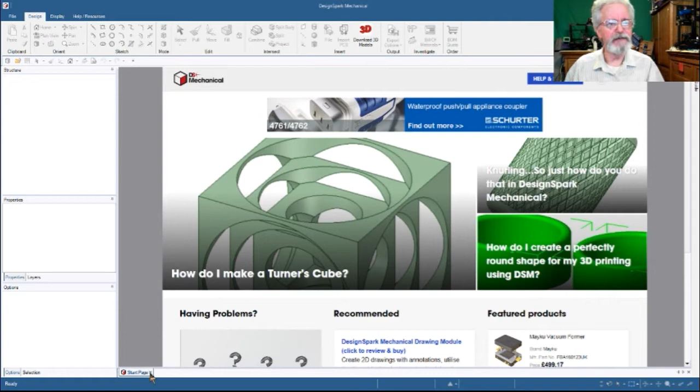Now this is DesignSpark Mechanical. This is the startup page. We're going to go ahead and kill that, and that gives us our blank space.

So we're going to go here, File, New, and create a new design. The very first thing I like to do in DesignSpark is, down here we have a tab that says Design 2, so we're going to save this file as spinning top. The reason we do that is as we progress through our design, on a periodic basis we are going to hit Control-S to save our work.

Now, DesignSpark does have an automatic save feature, but in my experience it doesn't seem to quite work well. I can show you how to get to it.

If you go here to the DesignSpark options, a window is going to come up. Let's see, it's not going to show up on our video because it's not part of the main DesignSpark window, so let's see if we can figure out how to pop that up. I may have to create a different window capture. Bear with me, because I really do want you to see this. So we're going to create a new window capture called DesignSpark Options window, make the source visible, and there we go. We'll capture the cursor too, and now you should be seeing the new DesignSpark window.

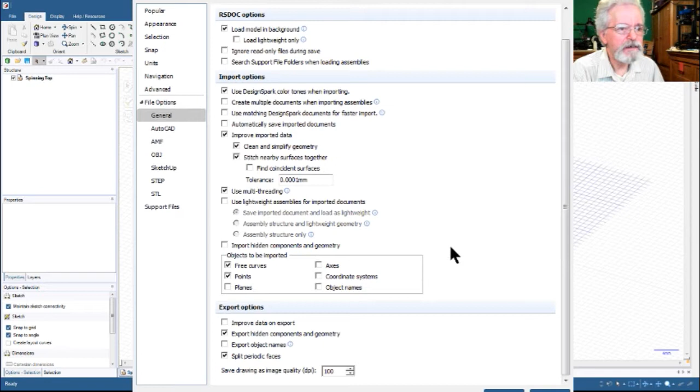Let's see, Popular, file options, and then we have general. Tolerance, is it further down? Here it is, under the support files.

So there's an option here for backing up every certain number of minutes. If we turn that on, we can choose how many minutes, and we can keep the backup files for a certain number of days, and we can tell it where we want the backup. This puts the data in the app data folder under roaming, which is kind of weird, and you can also clear the backup files if needed, or browse for a different location. But it defaults to the roaming folder under app data—so username, app data, roaming, SpaceClaim, and then the folder is auto save.

You can tell it to keep the backup file for 5 days. Now, what I have found is, for some reason, if things happen to these automatic backup files, things also happen to your main file. So I don't use this, I just do a Control S, but it's there if you decide you want to use it.

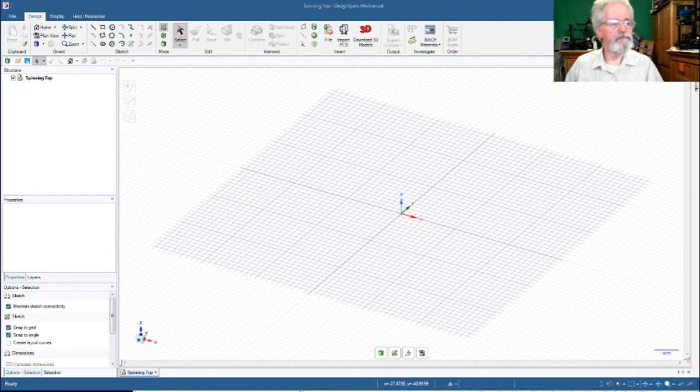There's been a number of issues with that. Now let's see here, my window changed, so let's go back to what we were, and we can turn off the options window. So that's how you get to the options.

You just go to the file menu and go to DesignSpark options, and that will open the options window. Now here in DesignSpark, because of the way my video setup is set up, for whatever reason, you don't see the menu. So right now I have a window open. It's the menu window, the file menu, but my video capture card doesn't seem to be able to capture that part of the window. So I probably have something set up wrong, but I'm using Open Broadcaster Software to capture these screens.

Okay, so let's get started.

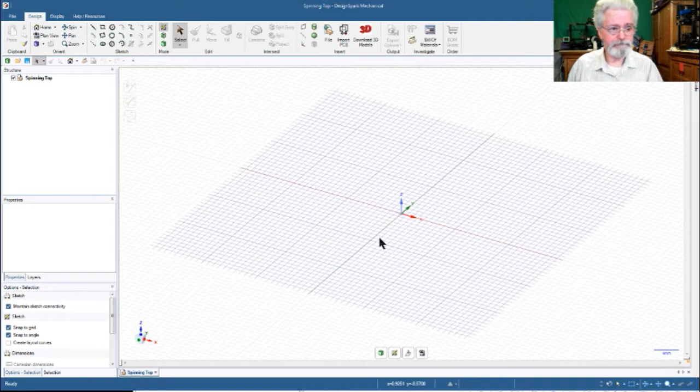So the first thing that we have here is we have a sketch plane, and we're going to hit V to make the sketch plane present itself face forward. And we're going to start off with a sketch. So the sketch is going to be for the top, not the top of the object, the top. So we're going to have a little bit of problem with nomenclature here, but that's okay.

So what we're going to do is we're going to create a top that's, let's see, let's make a top that's 100 millimeters in diameter.

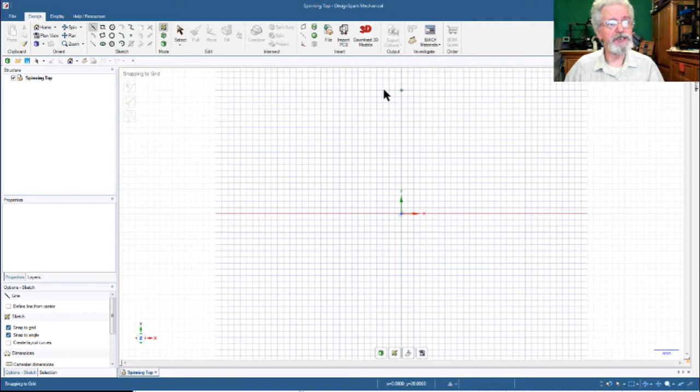So to do that, what we're going to do is we're going to draw some lines here. We're going to make a sketch, and we're going to draw a line. So we're going to hit the L key for line, and we're going to start here in the center, and we're going to come out, and we're going to go 50 millimeters. And that's going to give us a line that's 50 millimeters long, just like that.

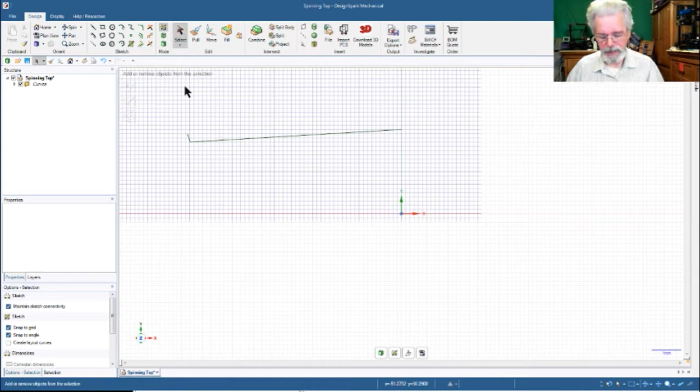Whoop. And we don't want to angle, so let's back that off a little bit and do this again. Line, 50 millimeters, and then hit enter. Now we've frozen that line in place.

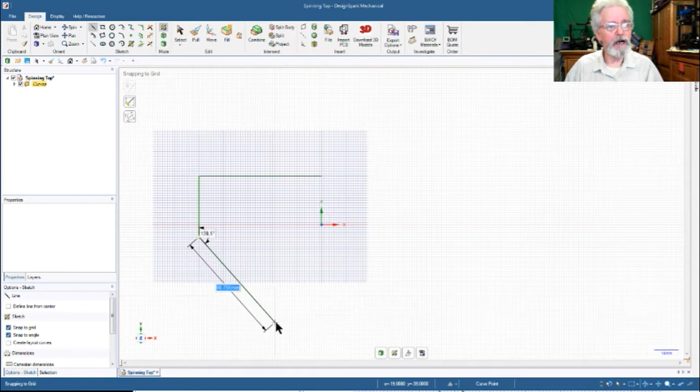Now we're going to do another line that is, let's say, 25 millimeters in the Y, and then I'm going to zoom out a little bit just to give us a little bit of working room. And then we're going to go, let's say, a 33-degree angle until we get back to our original line on the grid. So that is going to give us a top that has a point.

All right, and then we're going to do a line down and create a closed subject. And then I'm going to make a little construction line here at the top because we need that, for a particular reason. So we're going to go there to the corner, and then that's it. So we have our shape, which is our lines.

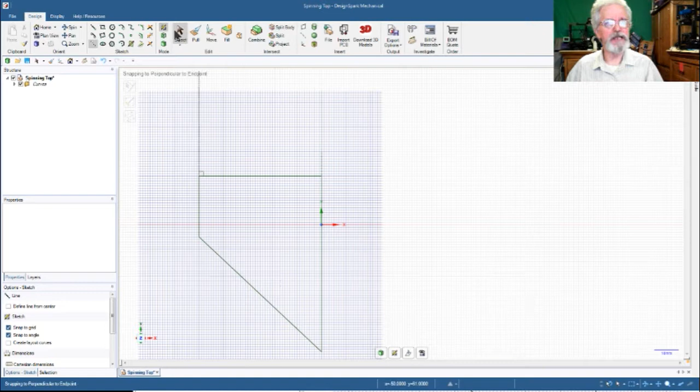And so let me go ahead and select all the lines so we can see the shape. And we're there, and there, and there. So there's the shape of our top. And we'll fix it up a little bit here as we go along.

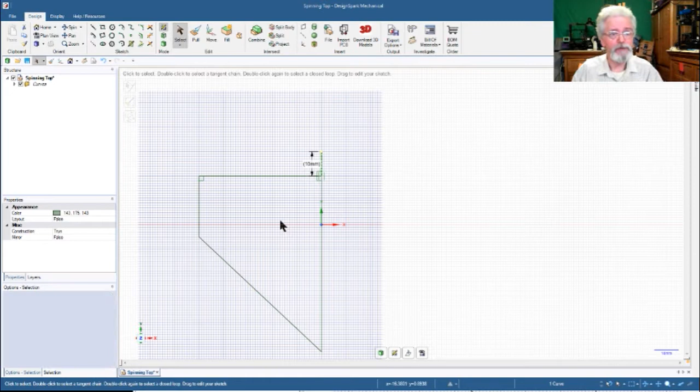And then we have our construction line here, which we're going to use as an axis. Now we're going to use that as an axis. So we're going to go P for pull, P on the keyboard for pull tool. And that's going to give us our solid shape. But we want to rotate this.

So we're going to go P, and then we're going to say we want to rotate, and we're going to choose an axis to rotate about. So we're going to choose the construction line. And then rotate - it says rotate the face around the axis, select one or more faces to revolve, and then that's it. And then we're going to say right here, full pull, and that's going to rotate this shape around that construction line as the axis. So we're going to click on that.

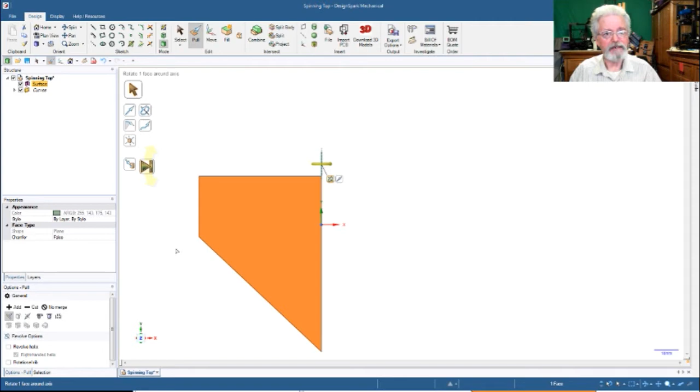And there it goes. My computer's a little slow because it's a little old, but now we have a top, and as you can see, the top is cylindrical that comes to a point. And so that gives us our basic shape of the top, and it's fairly easy to do.

A lot easier to do this way than in Fusion 360. It's very simple. You just draw the sketch and tell it to revolve around the axis, and you're done.

So, Chico, be quiet. Hey.

The dogs have no concept of video.

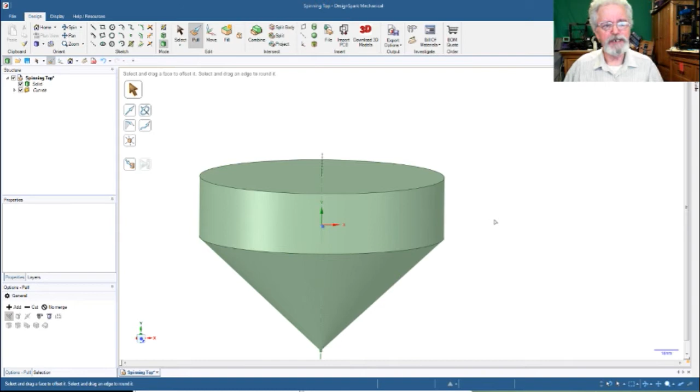Now the next thing we need to do is create a hole for the spindle that you use to spin the top. So we're going to go here to the top, Control V, and bring that to the center.

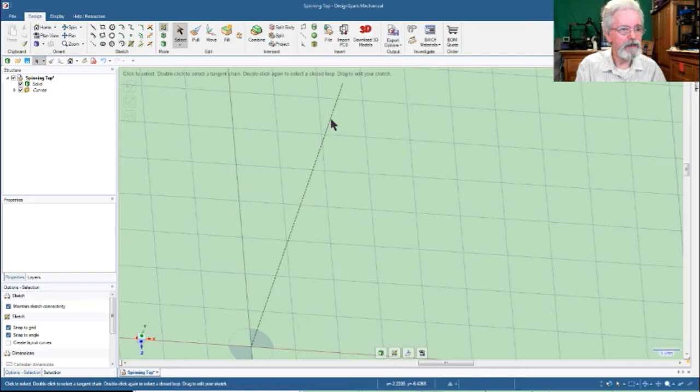Right now we have our construction line still there, so we're going to select that, if we can get a hold of it. It doesn't seem to want to let us get it. Let's see here, if we change planes, there it is. Okay, so now we can select it and delete it. All right, so now that's gone.

So now let's go ahead and change planes again. Just click down on the bottom and then we can pick that up. Now we have the plane we want, so we're going to use that.

We're going to zoom in a little bit and create a hole for our spindle to go in. So we're going to hit C for circle, go to the center, and we want a spindle that is, say, 6 millimeters in diameter.

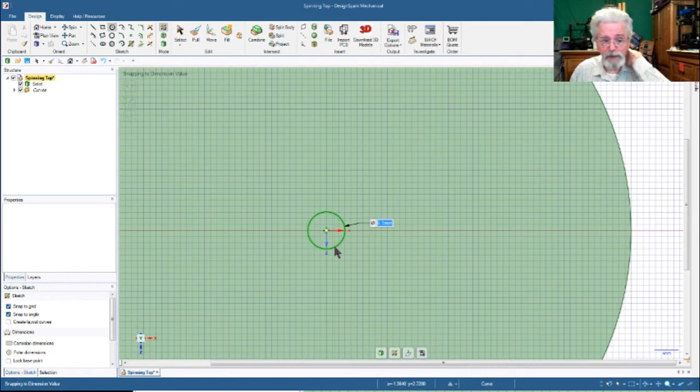Actually, we're going to do this a little bit bigger. We want to say 6.1 millimeters. Now the reason we want the 0.1 is this is going to be a press fit for the spindle, and if we create a spindle that's 6 millimeters, it probably won't go in there.

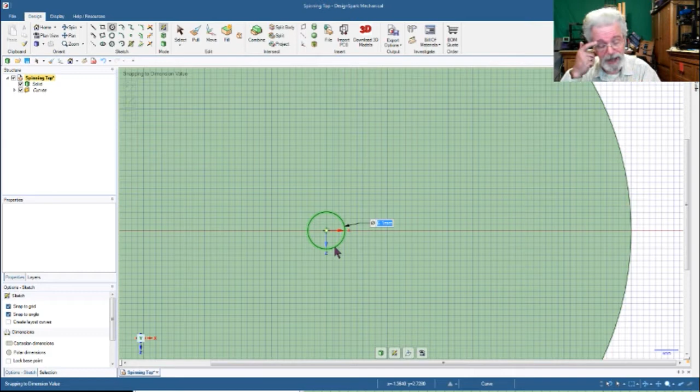And I know the tolerance that my printer prints, if I'm in a circle and I go to 0.25... let's do this instead. I want to do 6.2 millimeters, to make this just a little snug, so it's going to be a press fit.

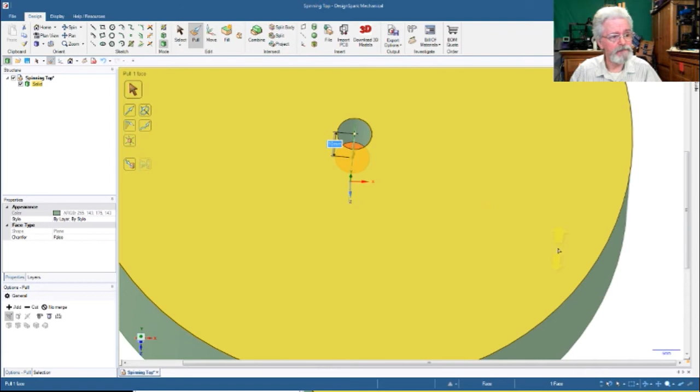So we're going to get out of that mode, hit D to get back to three-dimensional mode, and then push this down into the shape, let's say 10 millimeters. So that gives us a hole 10 millimeters deep and 6.2 millimeters in diameter.

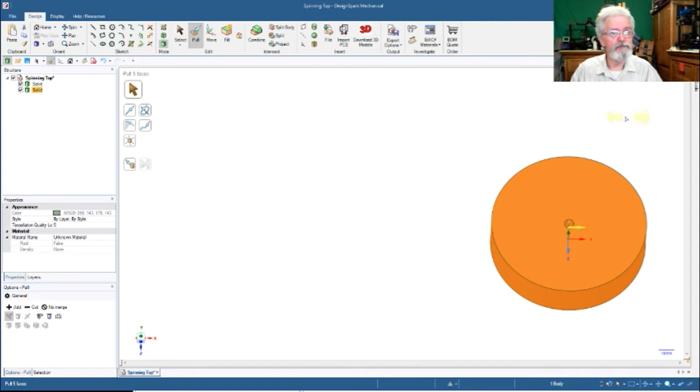All right, now that gives us one hole. Now let's say I'm going to copy this object. I selected it with the select tool and did a Control C, then pasted it, then went to the move tool in the ribbon menu and just moved this over by 150 millimeters, just to give us some space to work with. So now we have two tops.

Now, one of the interesting things we can do is make this top hollow. There's an interesting way to do this. This top is an enclosed object, and there's an interesting aspect in the shell command in DesignSpark.

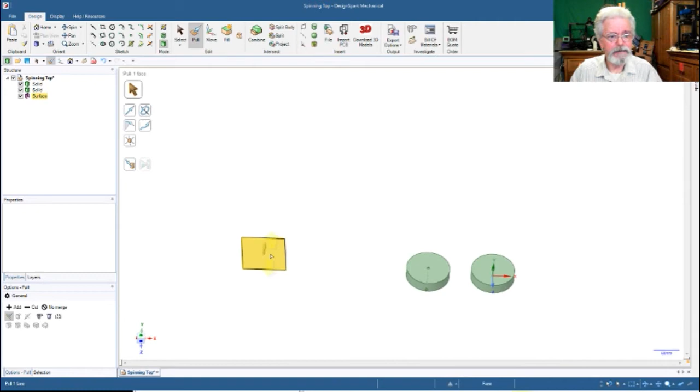For example, just for the heck of it, if I go here to a sketch plane and do a rectangle, R for rectangle, and create a rectangle that is, say, 100 millimeters square, and I go back here and pull that up 100 millimeters, now we have a 100 millimeter square cube.

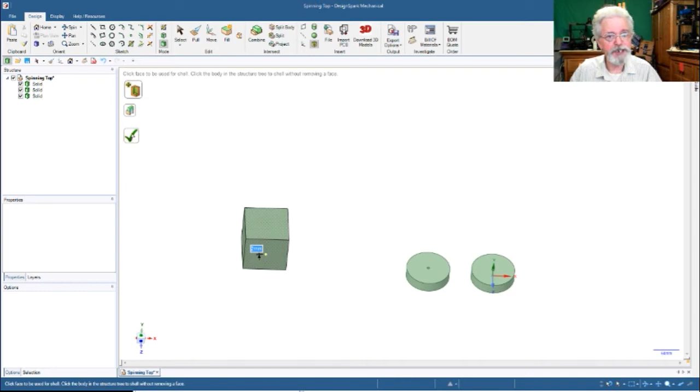Now I can actually create this cube as a hollow cube where there's nothing inside it. How you do that is you go over to the component list, select the component and highlight the whole thing, then go to the shell option up on the ribbon, and it asks how thick you want the wall. It defaults to 1 millimeter, so let's say 2 millimeters. When we complete the shell with the check mark, we now actually have a hollow box.

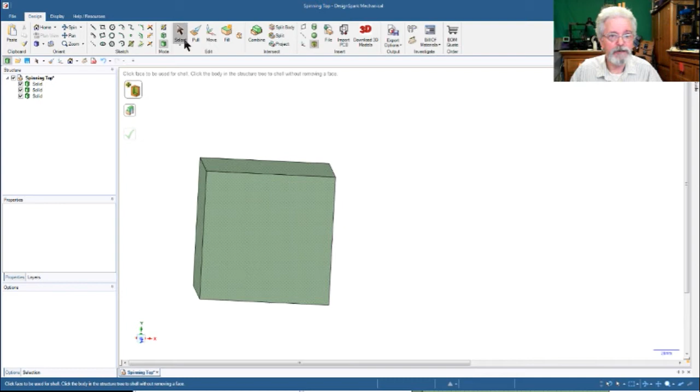You can see here it's a little crooked, so let's see if we can figure out how to move it around. Let's go ahead and select it. So here we have a cube.

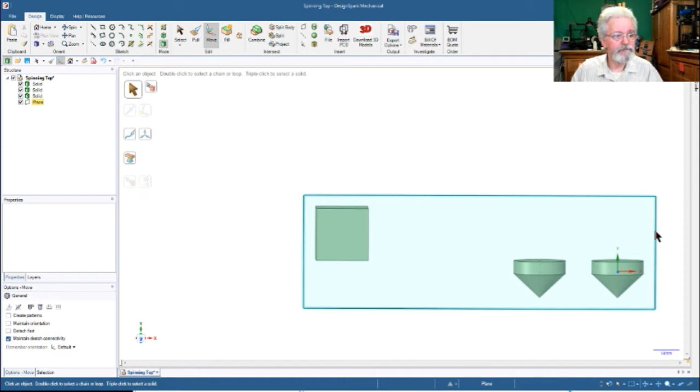Let's create a plane, and it's creating a plane for the whole sketch here, as you can see. But we want to create the plane so we can split the cube. Let's move the plane over here. Now I got to be careful because I don't want to cut my tops. Let's see if we can move the plane over. No, it doesn't like that.

See, it's going to cut right through the tops. So let's...

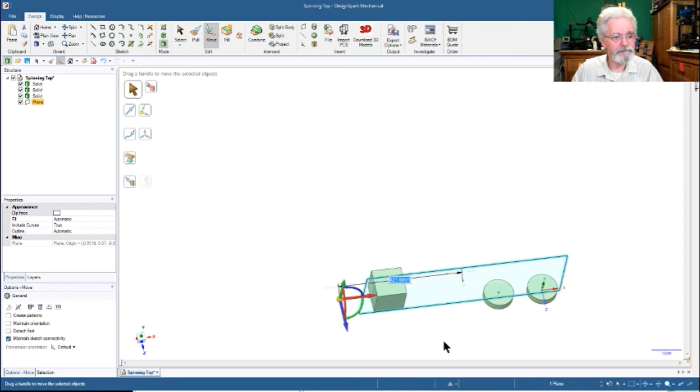Let me do this. I'm going to kill that plane, and I'm going to move the cube. Got to select the whole thing to move the whole thing there, and then I'm going to create a plane on the face of the cube. That way we can avoid our tops, and then we can move the plane

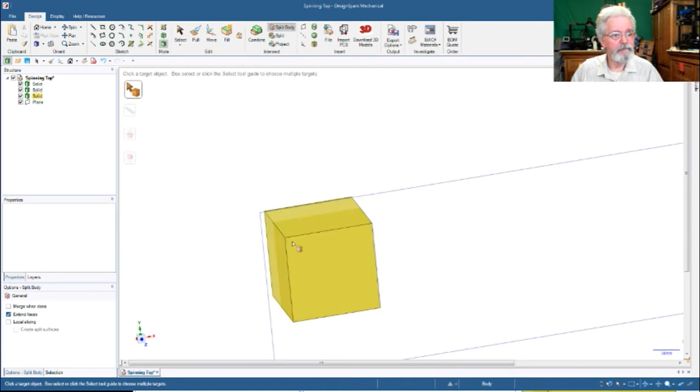back into the cube. And now if we come into the plane and we tell the plane to split the body, so we want to split that body, and we want to use the plane to cut the body. So now that creates a cut in the cube.

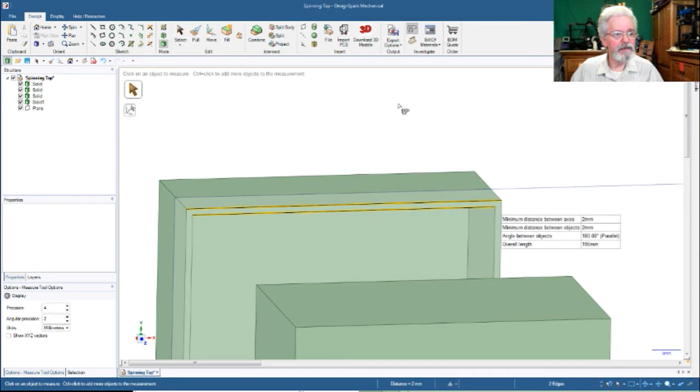And so now we have solid 1 and solid 2 here. So if we say solid 1 and we tell solid 1 to move, we're going to move it out, and you can see here that there's actually a shell with a 2mm wall. So if we go here and here and we tell it, here we have 2mm.

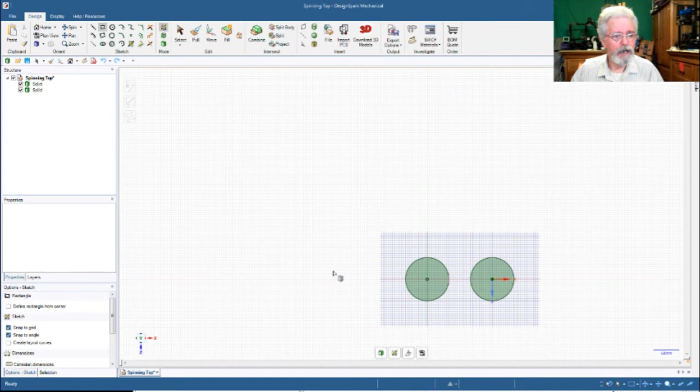Okay, so that's how you create a hollow shape. Now, so you can do that. So let's go ahead and back out. And we'll get back to our tops.

So now, here we have our solid top over here, and this is the top we're going to use to make a shell. So if we select this, we're going to rename these objects here so we can keep track of them.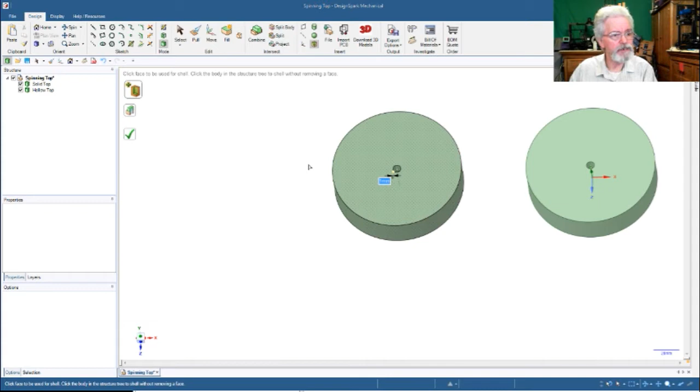This one is solid top, and this one is hollow top. All right, so this one is the hollow top, so we're going to shell this one, and we're going to tell it we want this one to be 2mm. So now what we've done is we have created a hollow top with a 2mm shell, including inside of the hole. Okay, so this hole is 10mm deep, and then 2mm below and around this hole is empty space. Okay, so that's pretty much how that works.

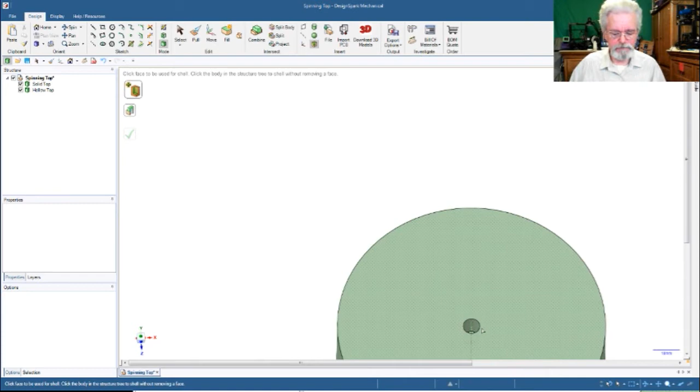So I'm going to go ahead and hit home, and then we're going to go ahead and rotate this around. Now, what I'm going to do is I'm going to cut some holes in here, and see if we can't make something that can make a sound.

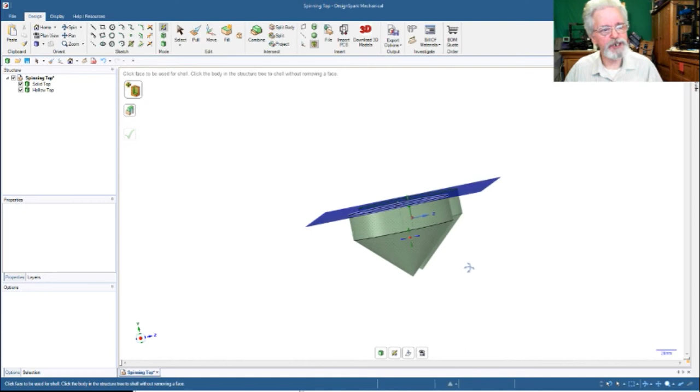Because we're dealing with cylinders, it's a lot easier to deal with the sketch planes. So if you go K, V, and you select the top, then you can change the plane to a particular surface. So in this case, what we want to do is we want to change the plane because we want to sketch on the side here.

So let's see if we can't select a surface to... maybe we're not going to be able to do that. Let's see. So we have our cylinder, K V. There we go. All right, so now I believe we're probably, yeah, we're on the surface. All right, so that's what we want.

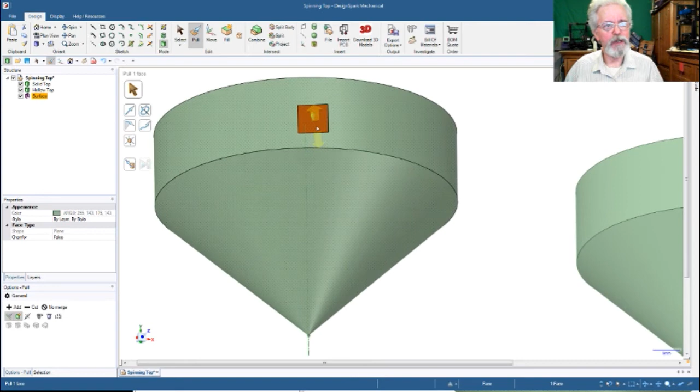And so what we're going to do is we're going to put a rectangle 10 millimeters square in that surface, and now we can use that to punch a hole, and we're going to punch a hole all the way through.

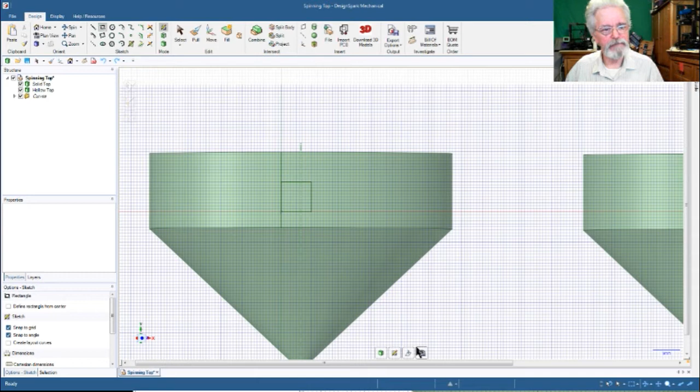All the way through. Oop, we ended up punching a hole. Let's go ahead and back up a little bit. And we're going to lower our rectangle slightly so that we can miss our center point. So we're going to draw the rectangle there, pull it up slightly, and go through all the way.

And so now you can see inside of the top there is our hole, and if we spin it around you can see it comes out the other side. All right, and so these are going to be our...

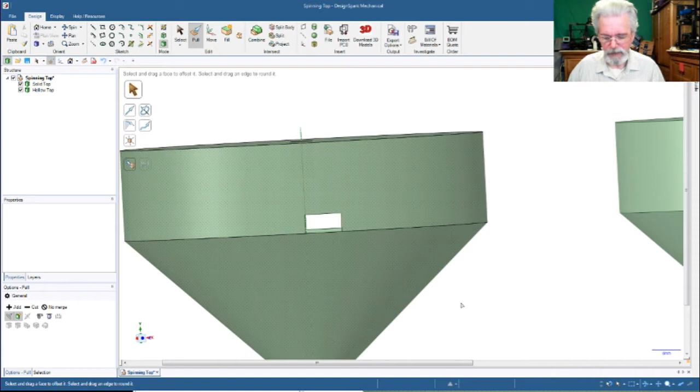Actually we need to center these, so let's figure out how to center them because they're not quite centered. So let's see, and part of the reason is our sketch plane is not centered.

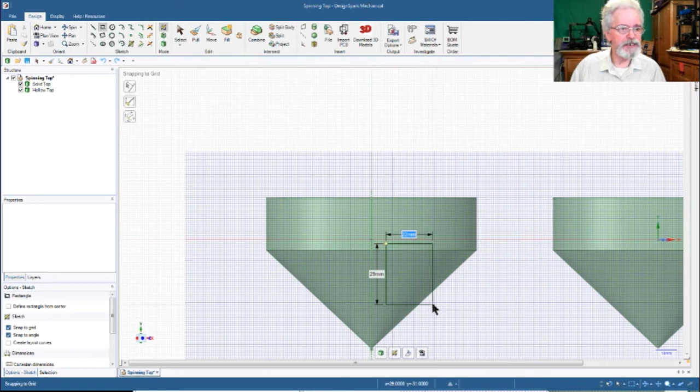So all right, so now there it is, it's centered, we're looking straight on, and then we're going to go ahead and we're going to say 1, 2, 3, 4, 5, and we're going to draw a rectangle that's 10 by 5.

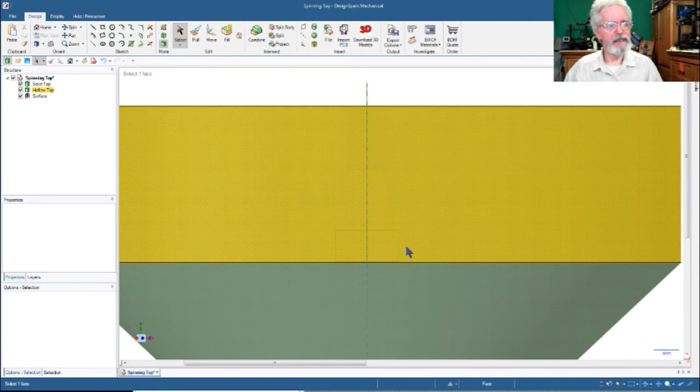And let's see, I think I probably goofed that up, so let's bring that out 1 and bring that in 1. So now we're right on the center, 10 millimeters on our sketch plane. Go here and then go here, and then we can push it through.

You can see there's a little bit of offset here, and that has to do with the curvature of the shape of the top and in relation to the sketch plane. So let's go ahead and tell it to pull, and we're going to pull that all the way through. Just make sure we get all the way through. We haven't hit the bottom, and there's our hole on the other side.

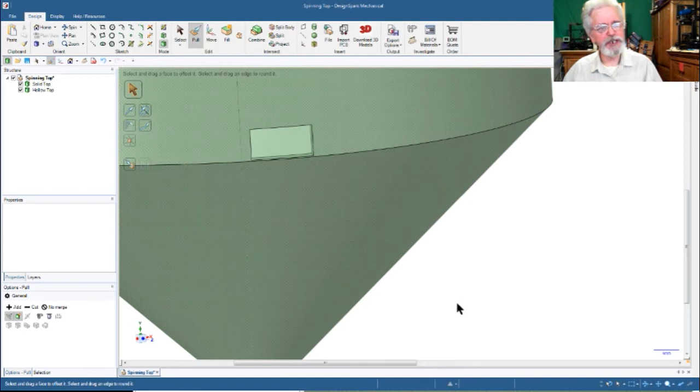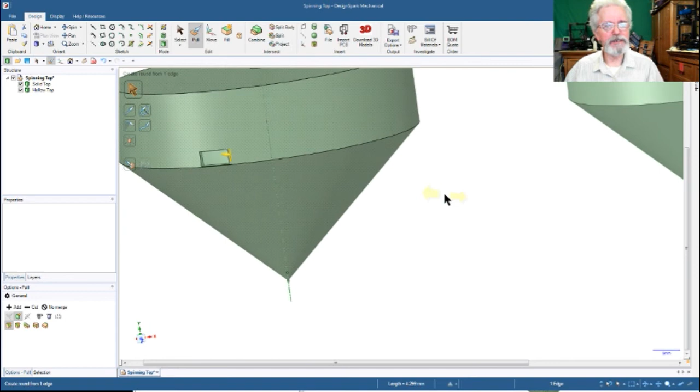Okay, so now what we want to do is we want to make a little chamfer to make this whistle as it spins. Now we don't know which direction it's going to spin yet, so we want to just catch both of these edges. So we're going to highlight this edge, scroll out a little bit, turn this way, scroll back in this way, and hold down the control key, and now we have both edges selected. Now we're going to zoom out, and we're going to flip this over so we can get at the other side.

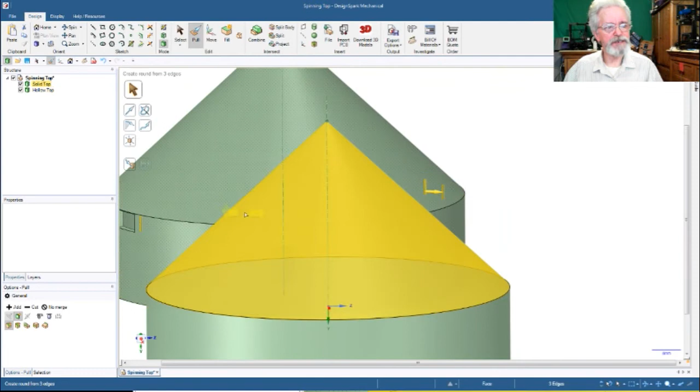It's just flip it over 180 degrees, and then we're going to zoom in. We're going to catch this edge, hold the control key, and then we're going to rotate it a little bit, and then pan, hold down the shift and use the scroll wheel. Let's see, am I lost? I don't want to hit home because that'll change my orientation, and what I want is this edge that's back here. So now let's go back in here, and then we can zoom in and hold the control key and hit this edge. Now we have all of our edges selected.

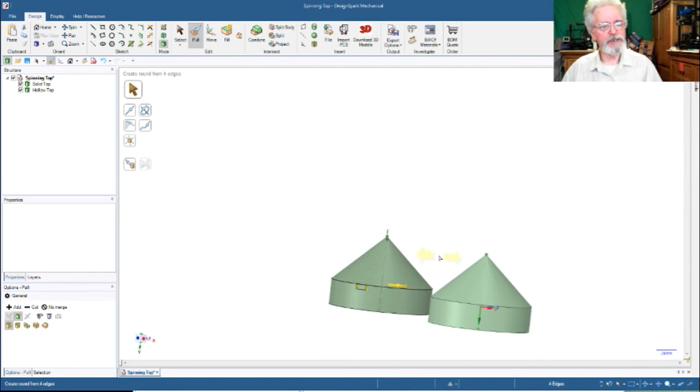So now we're going to zoom out a little bit, and we're going to rotate this 180 degrees again to get back to our starting point, because here in DesignSpark we have to do our move from the starting point. So whatever direction of the arrow is, and I'm going to rotate this just a little bit so you can see what's going on. So now what we're going to do is we're going to create a chamfer, select chamfer, and then chamfer these 4 edges.

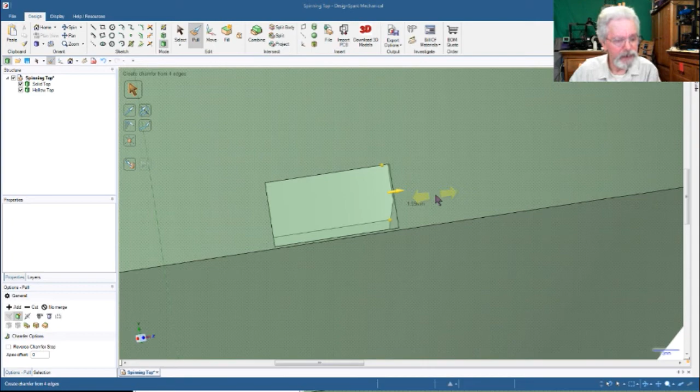So we're going to go ahead and bring them down to, let's say, 1.75. That's going to give us a little bit of an edge right there. Okay, so it narrowed the wall just a little bit, just enough to make things whistle a little bit.

And so at this point we now have a hollow top and a solid top, and it's time to create our spindles. So now I'm going to hit the home key, and I'm going to reset the home view because I don't want to have to keep moving things around.

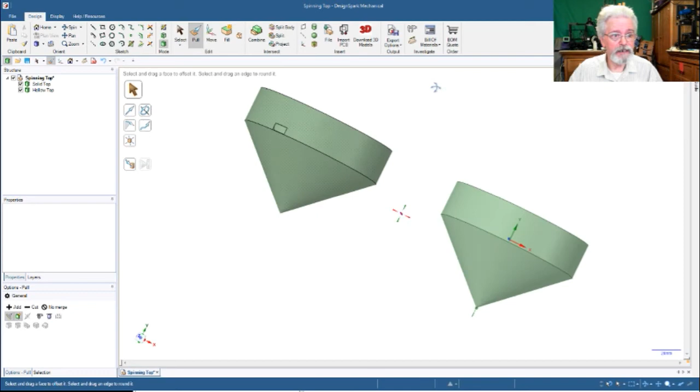Let's see, we're going to go here, and then we're going to go here, and sometimes getting things navigated is just a little interesting. Now we're going to go up here to the home button, and there's a little down arrow by the home button on the ribbon. If you click on that, it says set as home view. So set that as home view. Now this is home. So if I go like this and I say hit home, it's going to pop over here, and this is going to be our view.

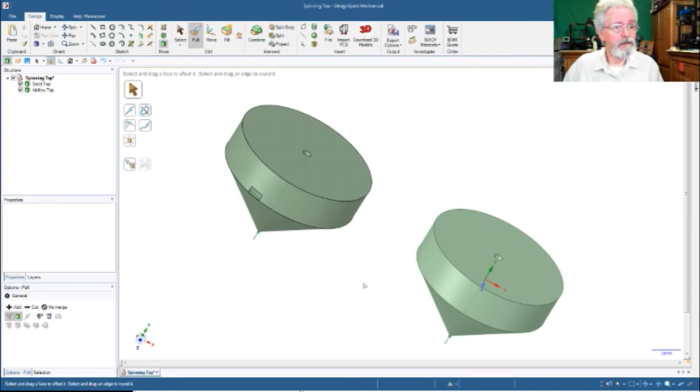All right, now we have a hole in our top that is 6.2 for the diameter, 3.1 for the radius.

And so now what we want to do is we want to create a spindle, and the spindle is going to print into the hole. We're going to print the spindle in a different orientation than the top to give the spindle some strength, because to spin these tops you got to wind them with string and then pull on the string, and that pulling motion exerts a bit of force. If we were to print the spindle in the same orientation as the top, it would break the spindle at the layers. So we don't want to do that. We want to print the spindle laying down. And so that's what we're going to do.

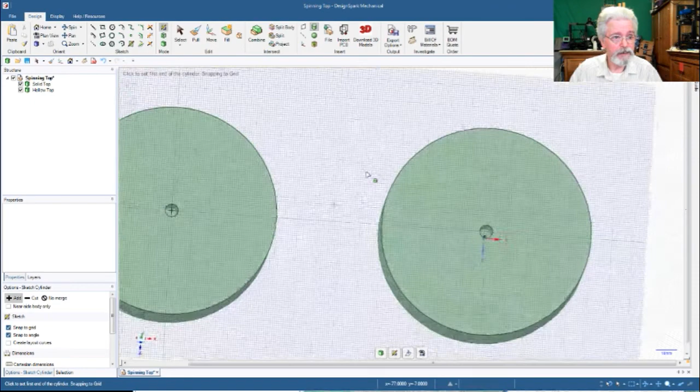Now, to create the spindle, the easiest way is to just create a cylinder. So we selected the cylinder tool, and we're going to hit K, V, and we're going to select the top here, and we're going to draw a cylinder, and we're going to make the cylinder 6 millimeters.

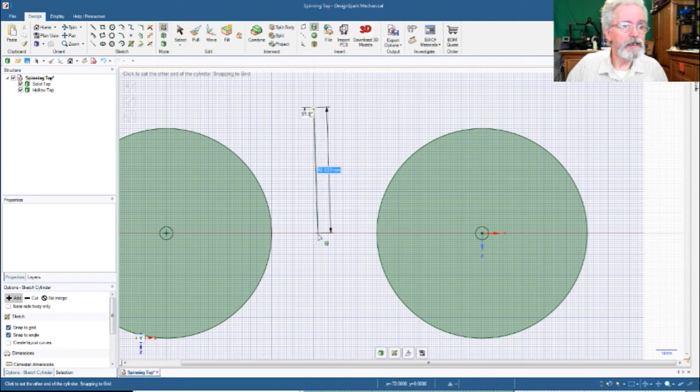We're going to make the cylinder 60 millimeters long and 6 millimeters in diameter. So that's what we got there.

All right, so now if we hit D, there's our spindle. It's 60 millimeters long by 6 millimeters in diameter. Now that'll fit in the hole, it'll just press fit into the hole. Now we could have made it longer, and we probably should make it longer.

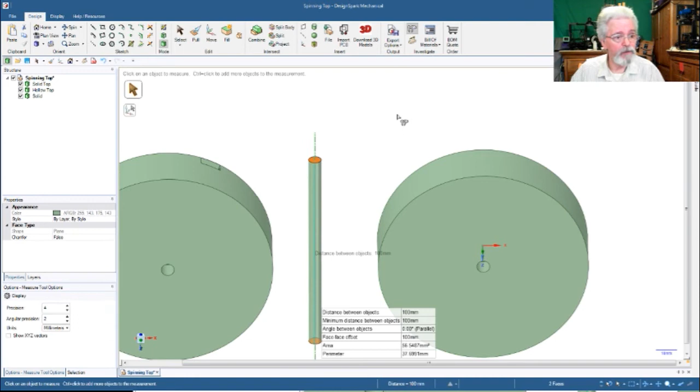So let's go ahead and grab the pull tool here, and let's add another 40 millimeters just for the heck of it. So now here's our cylinder, and it is now 100 millimeters long. All right, so that's our top.

Now all we have to do is print that, stick the cylinder in there, but then we have to have a launcher. Now the launcher is kind of an interesting construct because we have to have a handle and a place to put the spindle into, and a way to wind the string around the spindle.

So let's go ahead and get back to a sketch plane, and we're going to create a launcher. So let me rename the spindle here. Spindle. And let's create a launcher.

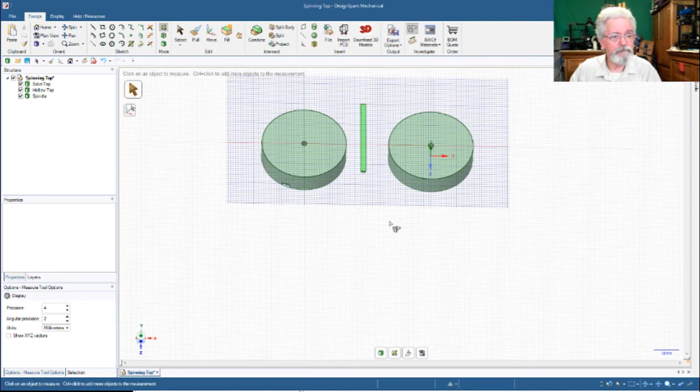Creating the launcher is going to be interesting because we just have to figure out how it's going to look. We need something that we can hold in our hand, and it's kind of going to look like a slingshot in a way. So let's see.

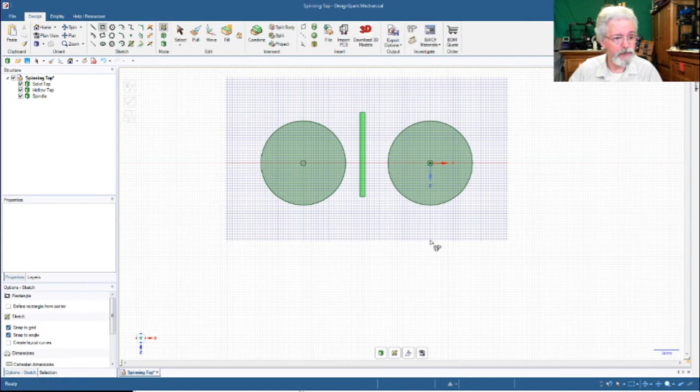Let's go ahead and do this. So we're going to start off with some basic shapes. We're going to go R for rectangle, and we're going to create a rectangle. Now we have to have a rectangle that's going to be at least 50 millimeters deep, because we have a 100 millimeter top.

So let's go ahead and create, let's say it's going to be 60 millimeters deep. Actually, we're going to need more than that. So let's say 80 millimeters deep. And we want it to be probably somewhere in the neighborhood of 60 millimeters thick, because we have to put a hole in it, like so. So here we are.

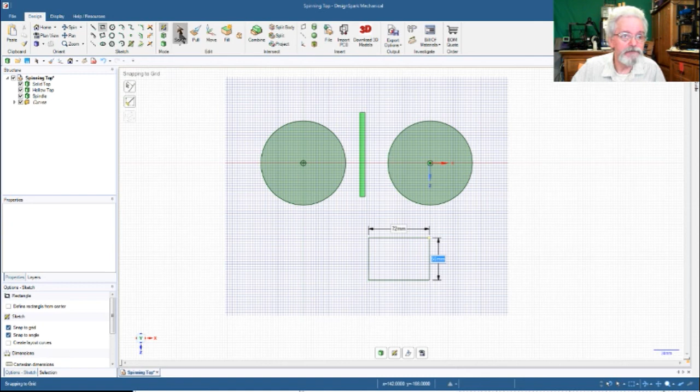So let me fix this because I didn't. So there's 80 by 60. Okay, so that's going to give us that.

Now we want to put a hole in it, and we know that the top is going to be 50 millimeters from the center where the spindle is to the outside edge. So we have to be careful.

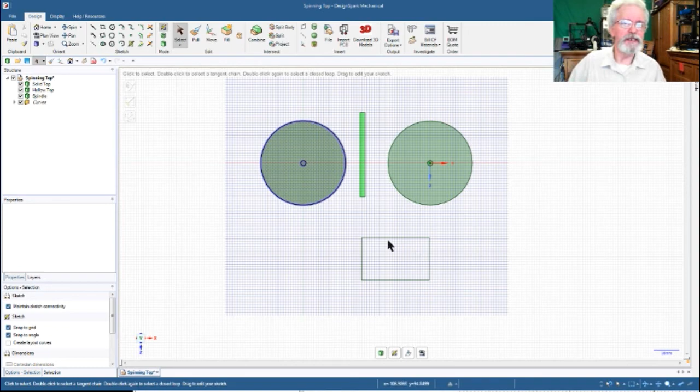We don't have a whole lot to work with here, so we're going to go circle, and let's scroll in a little bit so we can see. I'm going to go ahead and move the grid just so we can be a little bit more accurate. When in doubt, just go ahead and move your grids. There's nothing that says you can't move the grid to make things easier for yourself.

So now we have a square that is 80 millimeters by 60 millimeters. So if we put, and then, matter of fact, let's move our grid a little bit more so that we have it like that. So now we have our center right there.

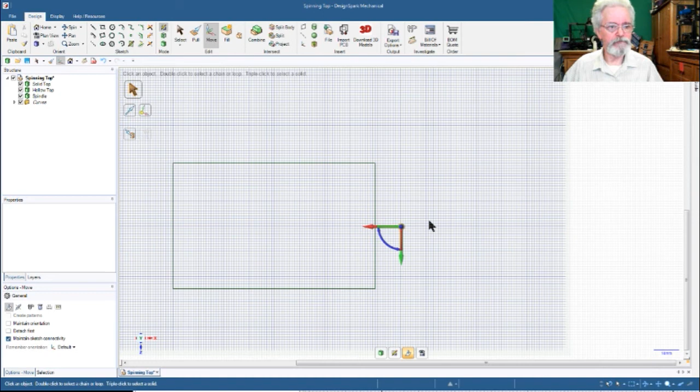Now we can use our centering. If we go here—oops, sorry. Now we have our centering here. You see where it calculates the center. So now if we go in by 20 on the 80, we still have another 10 clearance, and so we can create a hole.

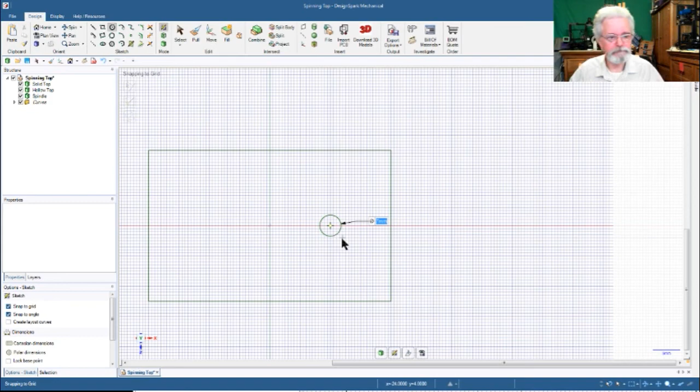So let's do a circle right here, 20 in, and we're going to call this circle—we're going to give it a little bit of room here. So we're going to make this circle 7 millimeters. It's going to give us a little bit of play so that we can stick the spindle into it. Okay? And we're going to go here.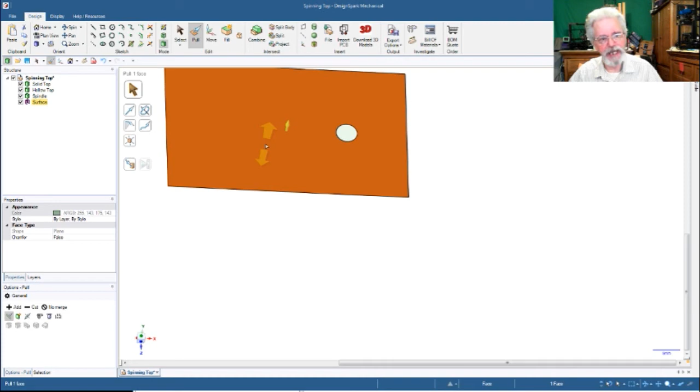And now we have a spindle that's 100 millimeters long, so we want to account for that. So what we're going to do is create our block using the pull tool of, let's say, 80 millimeters. That gives us a little bit of play. So 80, and you'll see what we're getting at here now.

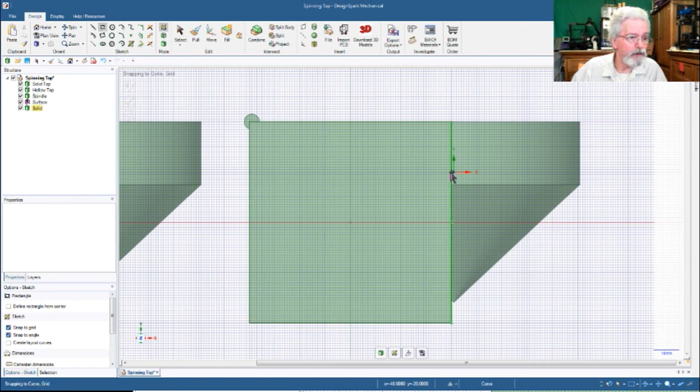So what we have is a block with a hole in it, a 7 millimeter hole. And now we're going to use this edge, and we're going to cut a shape out of it. So we want to use a shape—we're going to use another rectangle, and we're going to go here at the 20 millimeter mark. So these are going to be 20 millimeters thick.

And we need to leave a little bit of room for the top, so we're going to go in 65 and down to 40, and that's going to give us room for the spindle, because the top is going to be below this edge here, so that's going to give us that.

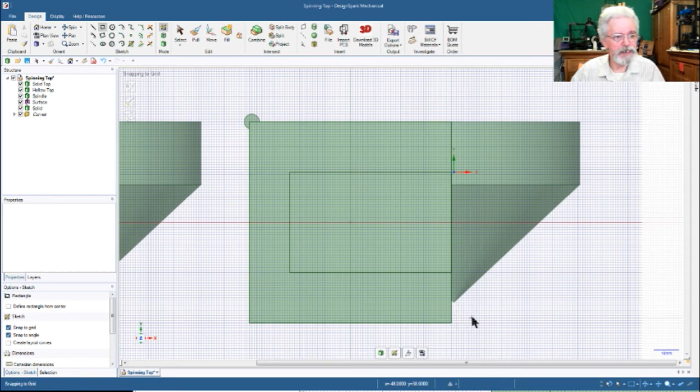So now let's go ahead and go back to our three-dimensional shape and use the pull tool and cut through there. So now we have a place here where the spindle will come up through this hole, and we can wind our string around it.

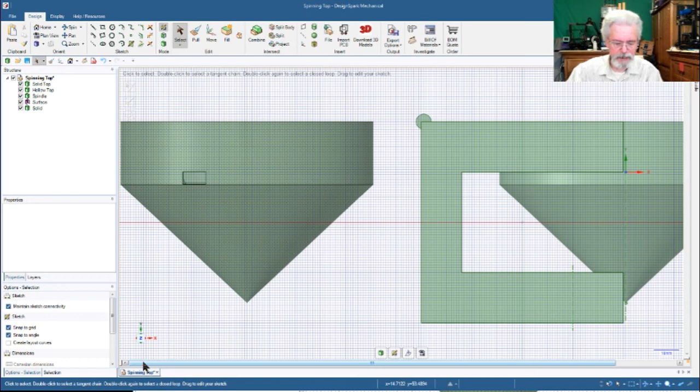Okay, and then we need another shape for our handle. So let's just go ahead and create a handle. Let's create a handle that's like 120 millimeters.

So we're going to go up here and do an R for rectangle, draw a rectangle, 120 millimeters long. And then we're going to tell it to be, let's see, 40 millimeters high. So that should be plenty.

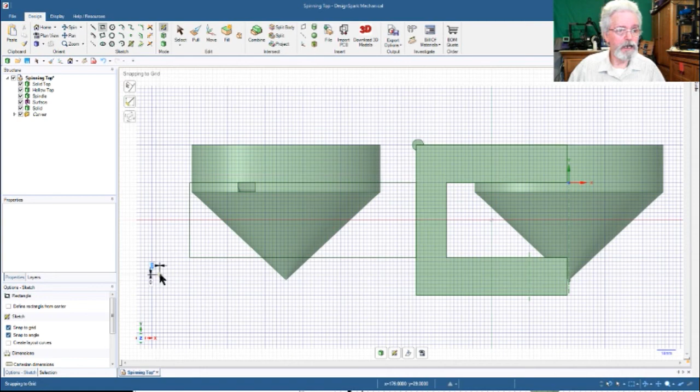Oh, we didn't set the 120. And so now we've got a handle that we're going to go here. We're going to say up to, and we're going to say to this edge. So that's going to give us that.

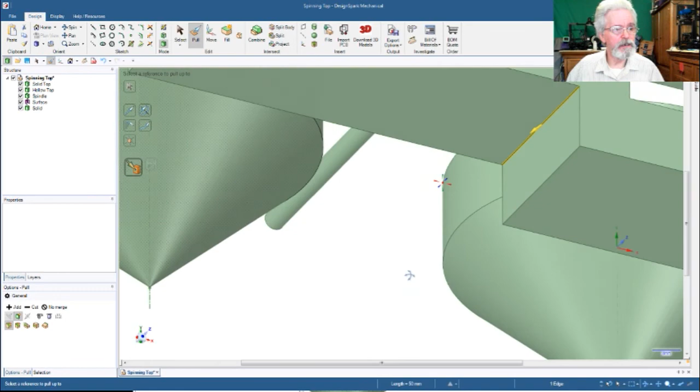And let's go ahead and round these edges a little bit to give it a little bit more body. So we're going to grab that edge, and we're going to grab that edge, and we're going to tell it—oops, I missed with the control key. Control—oops, I missed again.

Sometimes it's a little tricky to grab these edges. What's going on here? Is it not letting me grab the edge? Yeah, all right, so let's just do it this way. I'm just going to go ahead and round it all the way out.

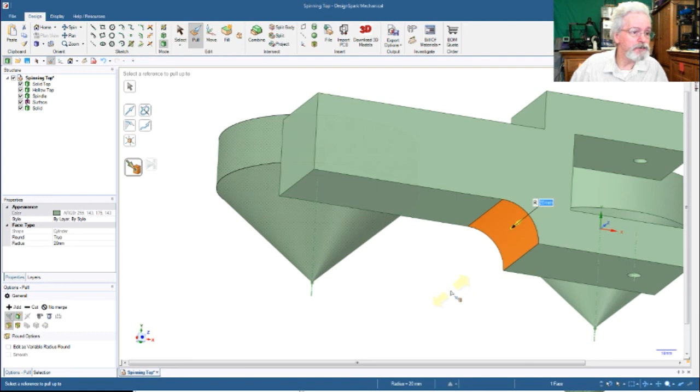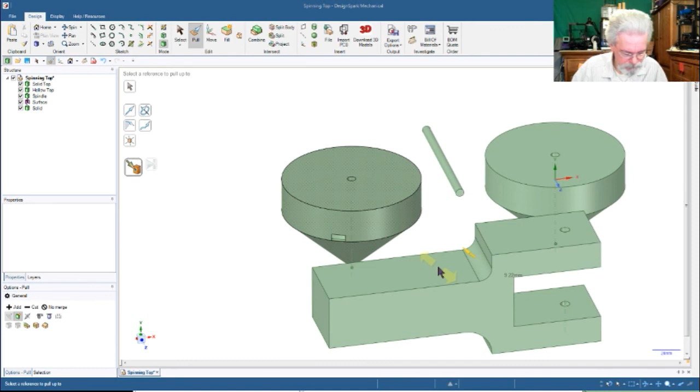So we're going to say 20 millimeters, give it a 20 millimeter radius. And we're going to do the same thing for the other side. So there's our handle, and we could do the same thing for the ends.

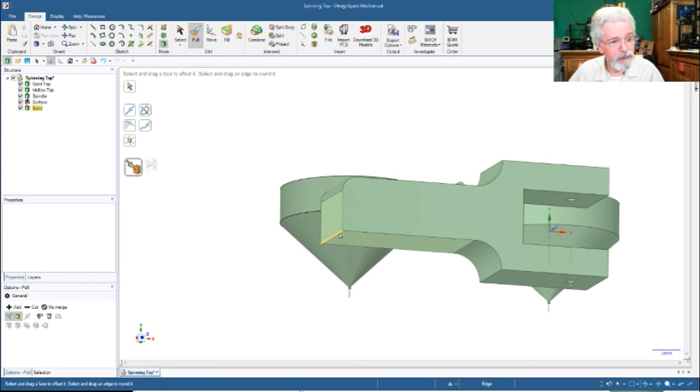Well, I don't know why it's not behaving today, but let's go ahead and say 10 for this end, and just do something weird there. We're not getting an arrow.

All right, so let's back out. So we've got that edge. Rounded corner, 10. We're going to come down to the bottom side, grab that, rounded corner 10.

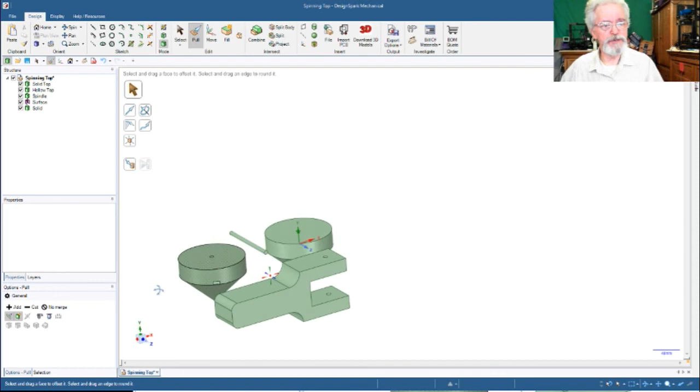All right, so now that gives us our handle that we can use for the top. And we might want to round the inside edges as well here. So let's say this one, let's see, can we grab that other edge? Let me move this up here.

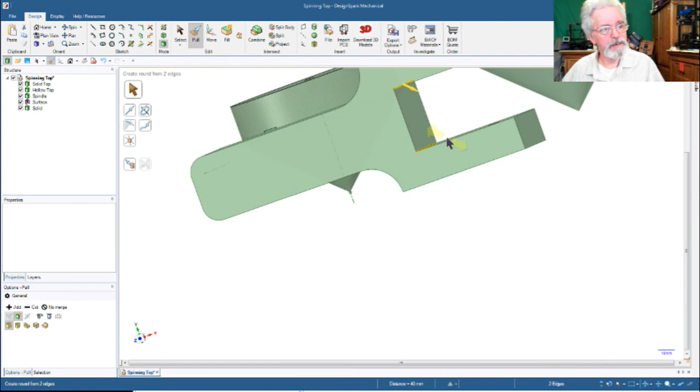Yeah, let's just do it that time. Strange. All right. And then we're going to go ahead and we're going to round these edges, and we're going to say 10. Like so. So that gives us a reasonable handle, something that's fairly easy to print.

All right, so now we've got all of our pieces here. What we have to do is print them. So that's how you create a top with a spindle and a handle in DesignSpark Mechanical. Very straightforward. Let me hit home so we can zoom out a little bit.

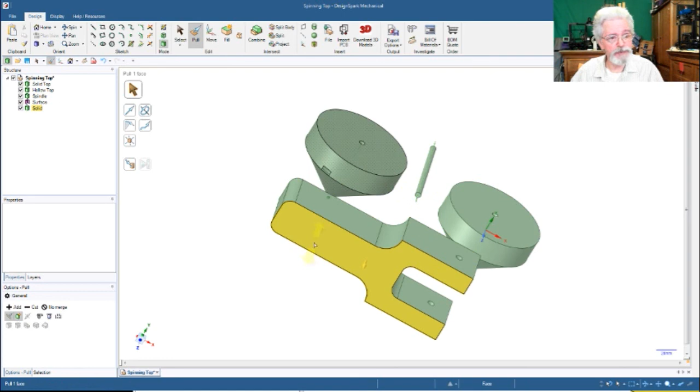And so we have a hollow top, and we have a solid top, and we'll print a couple of spindles laying down on a raft, because you're going to need a raft or a brim to hold those. And then of course we have our launcher. So let me jump back here to this shot. So that gives you an idea of some of the things that you can do very easily in DesignSpark.